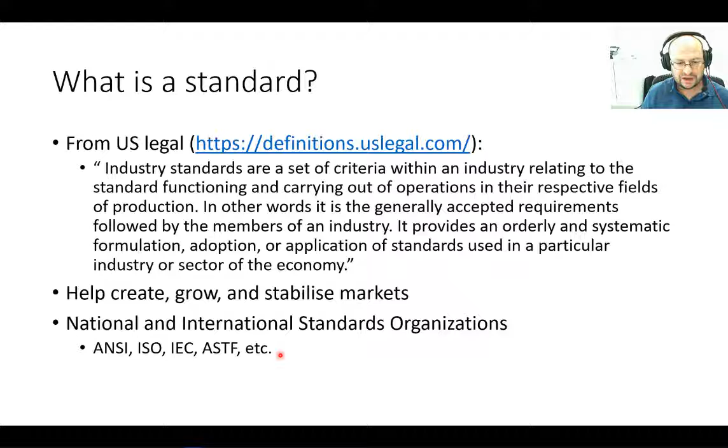There are a number of standards organizations, national and international. The international ones are usually cited as ANSI or ISO, but there are a few other standard organizations. The ones that pertain to us, robotics and collaborative robotics, are the ISO standards.

ISO 10218-1 from 2006 was the first one that calls explicitly for safety related to industrial robots development at the manufacturer level, establishing limits for force and power of industrial robots. Remember that collaborative robotics were only brought to light around 2010, 2012 to be more precise. So the first standards for robotics pertained only to the manufacturer level. So what are the standards for producing a robot? What would be the limits for force and power for a robot to be produced for the industry?

In the 2011 edition of this ISO, there were safety standards at the integration level. So given a robot and the way it's produced, what are the good practices of integrating a robot in a production line?

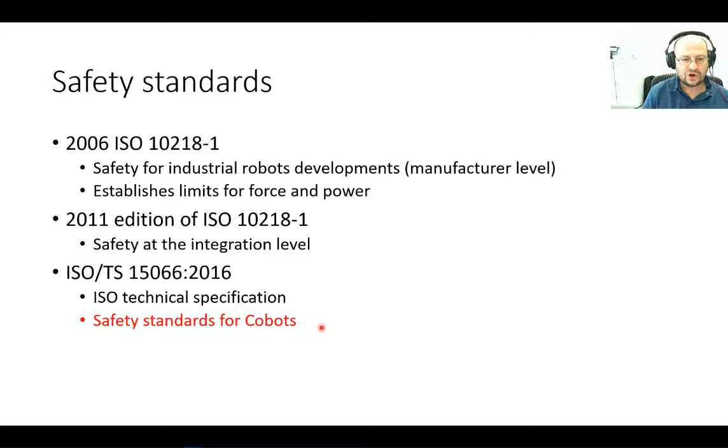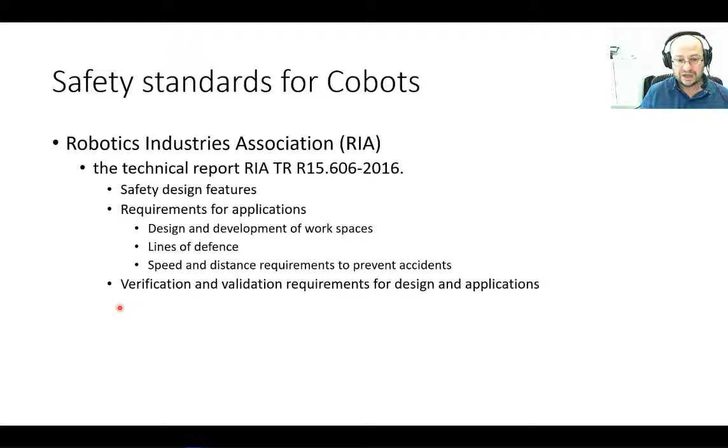And finally, in 2016, this is the most important standard for us, that's the 15066, which is the first safety standard for collaborative robotics. It defines the safety design features for a cobot and the requirements for applications. That is the first time applications are considered in the robotic standards. And the requirements talk about the design and development of workspaces, lines of defense, speed and distance requirements to prevent accidents, and verification and validation requirements for the design and applications of cobots.

So in these standards, there's a whole history of standards for robotics and collaborative robotics. These standards define several different types of collaborative operations, which we have to take into account when designing a cell and when producing the risk assessment of a cell.

If you want to know more about the standards, if you want to acquire them, you can do so by following this link. They are not cheap, I think each standard costs about $300. This is not for individuals to buy, it's for the industry. So you can purchase the new standard through that link.

There is a new standard from 2020, which now includes requirements for mobile robots, a good first step towards ensuring the safety of human workers near industrial mobile robots. For us, the cobot people in this cobot class, we are mostly interested in collaborative robotics, in the manipulator robots that can work side by side with humans. The newer standards take care of autonomous robots, autonomous mobile robots.

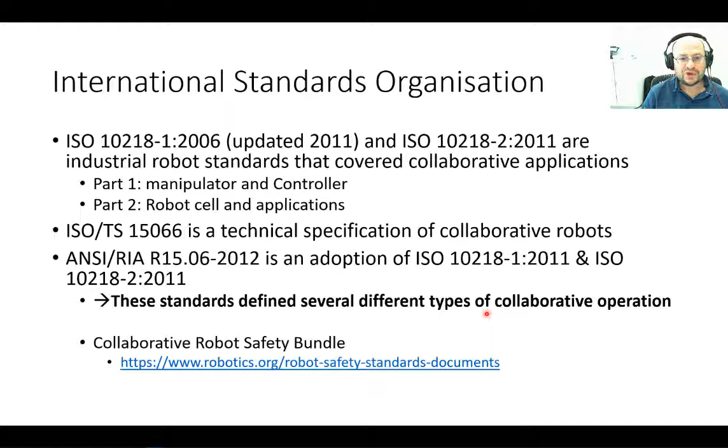So if you want to acquire standards, and if you want to develop a company on robotics, you should definitely buy all of these standards and be aware of these safety concerns and how to produce a safe cell.

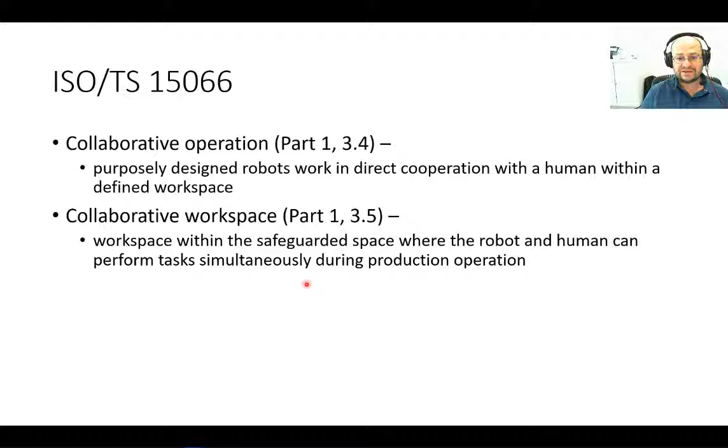In our ISO 15066, it talks about collaborative operations that are purposely designed robots that work in direct cooperation with a human within a defined workspace. That is the definition of collaborative operation. They also define a collaborative workspace, so you have to take into account the risk assessment of the operation and the workspace at the design stage. A workspace is within the safeguard space where the robot and human can perform tasks simultaneously during production operation.

So for safety in collaborative robotics, you have to take into account specific design factors that help the robot arm be safer for human interaction. This is obviously important if we want humans working side by side with robots. That's what we want, because humans are very good at creativity and problem solving, whereas robots are excellent at precision and repetitive tasks.

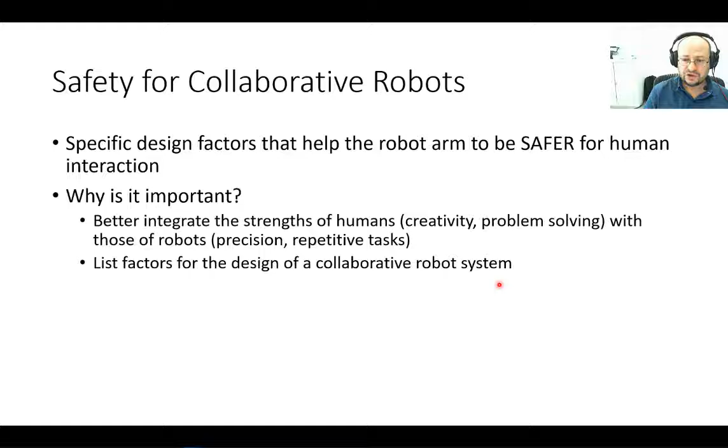So the ideal modern industry, what they call part of industry 4.0, is that we get the best of both worlds. We get the strength of humans combined with the strength of robots, and in order to do that, you need collaborative cells. But in order to have a safe collaborative cell, you have to follow a number of factors in the design of the collaborative robot system, such as what kind of function.

How would the robot and operator be working together? There are a few different kinds of operations.

One of them is coexistence, where robot and operator are in separate spaces. Usually in the coexistence workspace, the robots operate inside cages, and the robot turns off when a human enters its workspace.

It could be a cooperative coexistence, where both human and robots use the same workspace, but at distinct times. For example, if a human needs to load parts for the robot to manipulate, the robot will be off, the human will get close to the robot, put the pieces near it, press a button, and the robot will work on the pieces that were put in front of it. So there is no need for cages.

Or full collaboration, where both humans and robots use the same workspace at the same time. This can only function with strict restrictions of force, speed, and movement for the robot, for the safety of a human.

In a full collaborative workspace, there is potential contact between the operator and a robot. That could be either intended, accidental, or due to failure.

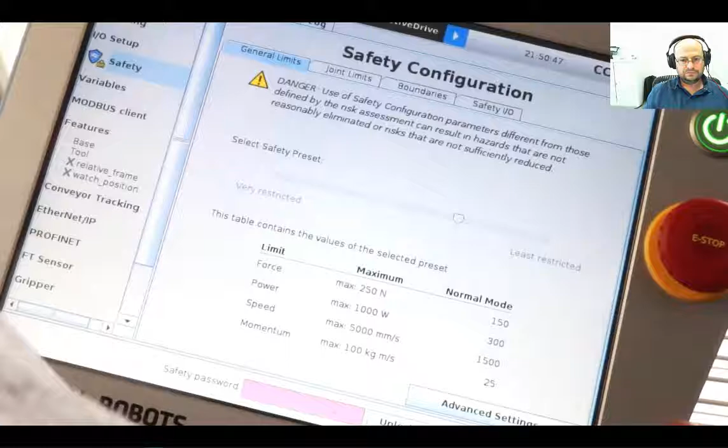In this video, you will learn how to calculate the pressure applied by a robot. Calculating pressure is simple physics. First, you need to know the maximum force the robot is applying in a particular direction. We usually rely on the force setting of the robot. For example, this robot is limited to 150 Newton.

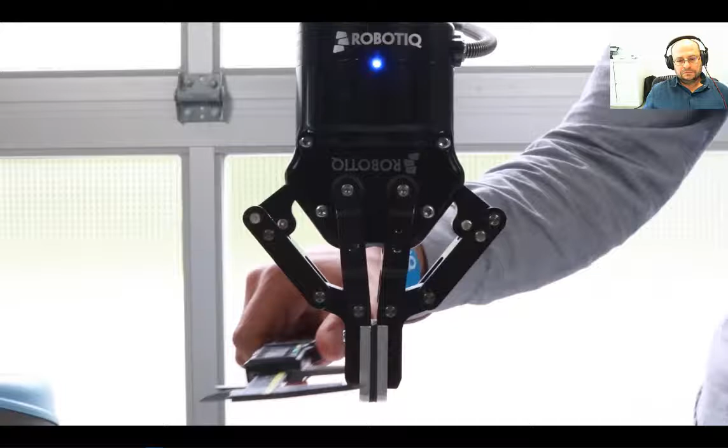You need to know the area of contact of the potential impact. First, measure the area. In this case, the area is 2 cm by 1.5 cm, which means a 3 square centimeter area. For a more complex geometry, other calculations should be used.

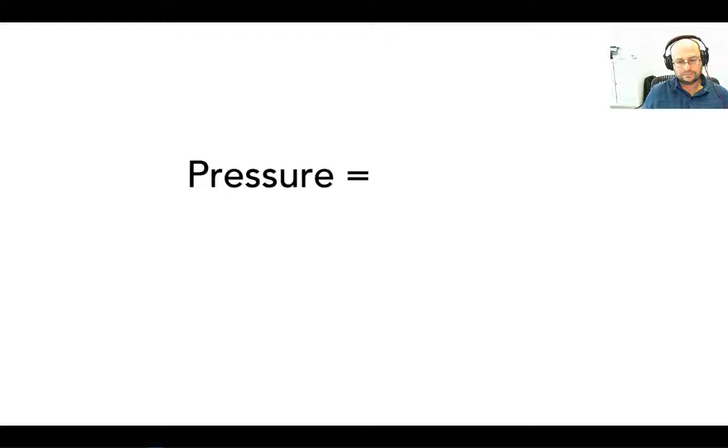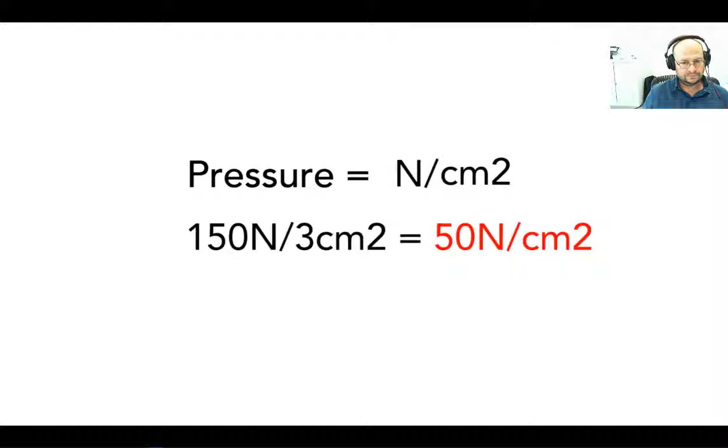The pressure is in Newton per square centimeter. By dividing the value in Newton by the value in square centimeter, you obtain the pressure value. For this example, the pressure is 50 Newton per square centimeter. According to the ISO TS 15066, this pressure is acceptable. To avoid reaching the pain level, you may want to increase the area or limit the force applied by the robot. Stay tuned for our next video on how to evaluate a risk.

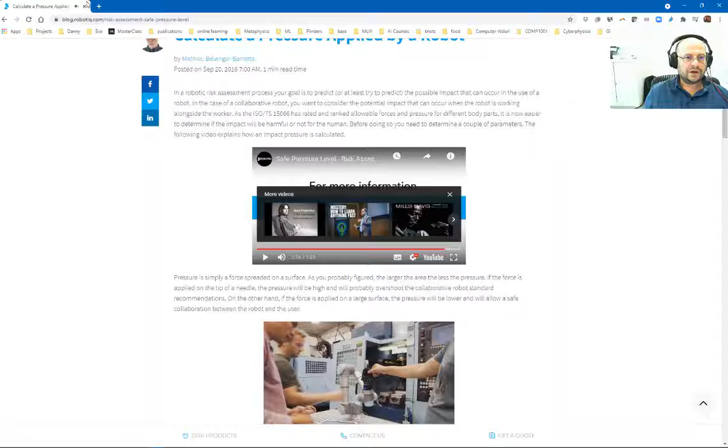Okay, so this video was about calculating pressure, and this is the big video that explains transient and quasi-static impact.

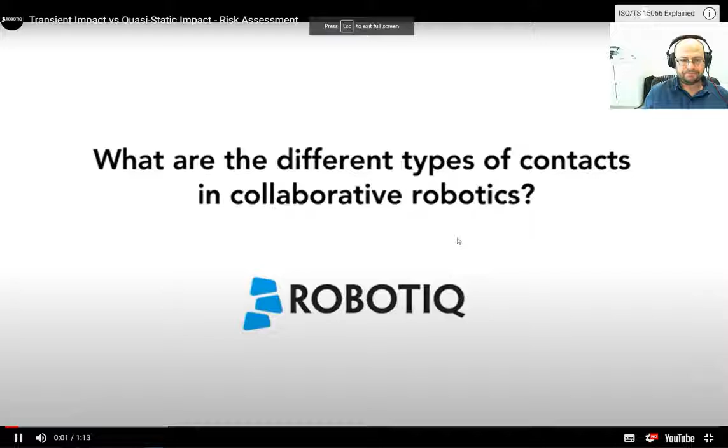Here at Robotiq, we know that collaborative robot safety is a huge concern for our customers. This is why we want to explain a couple of basic safety concepts using collaborative robots. In this first video, we will talk about the difference between a quasi-static and a transient impact.

A transient impact occurs when the robot hits you while nothing is holding you. In other words, you're able to move freely when the impact occurs. A quasi-static contact happens when the robot crushes you against a fixed object.

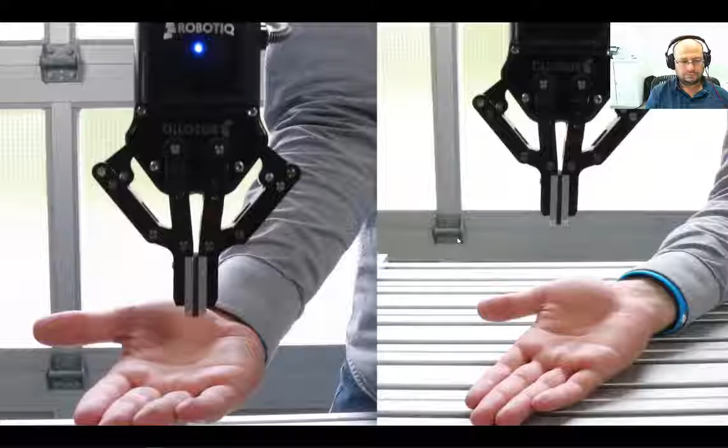To perform your risk assessment correctly, you need to consider that the pain level for a transient impact is 2 times higher than a quasi-static impact. According to ISO TS 15066, the pain threshold is 135 Newton for a quasi-static impact and 270 Newton for a transient impact. This small difference can make a big difference in your risk assessment process.

Stay tuned for our next video on how to calculate pressure due to an impact.

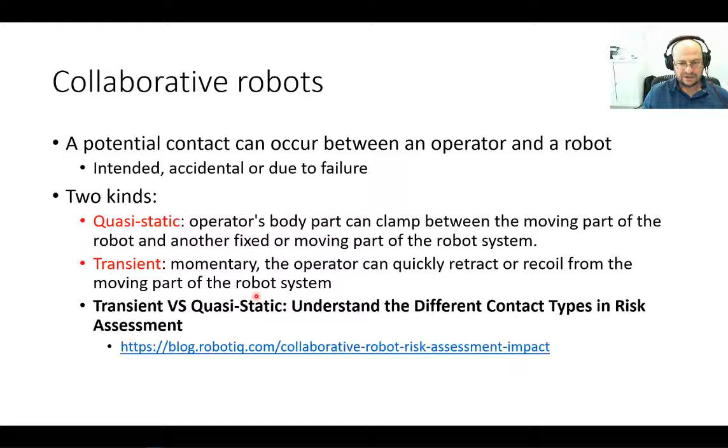Alright, so now you understand transient and quasi-static impact and how to calculate pressure.

Both are important concepts for you to create your risk assessment. You have to take into account the possible contact scenarios and the pain levels for risk assessment. We're going to see that there are tables for the pain levels for distinct parts of the body.

What the guy in the previous video said was that he just produced one single value, but there are actually different values for different pain levels in the body. Obviously the head can't take much pain, right? That's different from a hand or an arm. So the general rule is that in a transient impact, the force applied can be 2 times higher than the quasi-static impact except in critical parts of the body.

This risk assessment should be done when projecting a cell, and once the cell is completed, you have to run the risk assessment again and mitigate any potential risks.

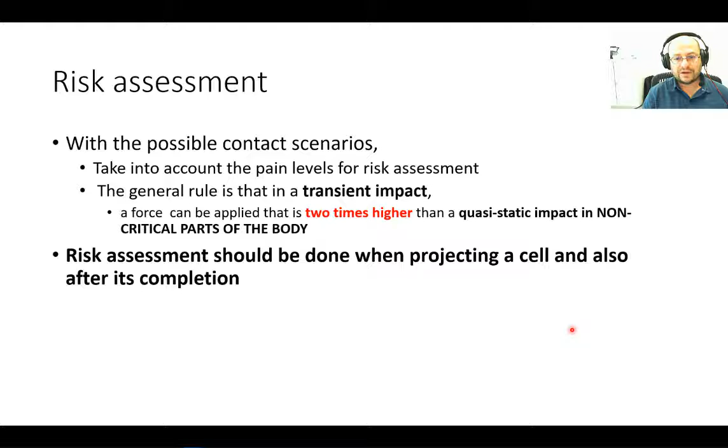So this is the table that I mentioned before, part of the 15606 standard. There's a body region, so skull and forehead are considered critical zones, and they are divided into specific parts: middle of forehead, temple, and masticatory muscle.

In a quasi-static contact, where the body part is trapped between a moving part of the robot and something fixed, there is a maximum permissible pressure of 130 newtons per centimeter square, and a maximum permissible force of 130 newtons.

This is for the middle of forehead and temple. In the masticatory muscle, the permissible force is only 65.

It's not that you want your robot to hit somebody's head. Actually, you don't want that to happen, but if it happens, this should be the maximum amount of force the robot can apply at that particular area. So when projecting your cell, you expect the robot to work around the person's arms, but if for some reason the robot reaches the height of the person's skull, the force should be reduced. You should design so that if the robot reaches a particular height, the force will be reduced.

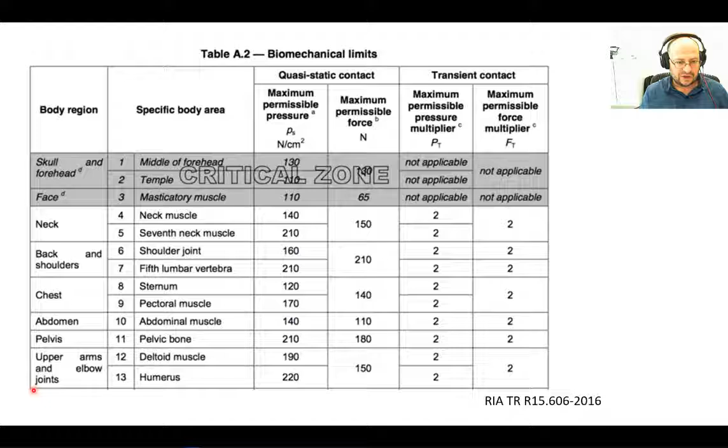As you've seen, pressure is simply force spread on a surface. The larger the area, the less the pressure. So if the force is applied on the tip of a needle, the pressure will be very high and will probably overshoot the collaborative robot standard recommendation.

So how do you mitigate this? You mitigate it by enlarging the area where the force is applied. You can't change the tip, so you're going to have to change your application.

If your application has a needle point, then it's not a collaborative application. You can't have a human working side by side with a robot holding a knife. It goes more towards traditional robotics, where you have to engage one of the less collaborative operations such as coexistence or cooperation. A robot holding a knife or a needle is not a collaborative robotic system.

Remember that the system is robot plus application, and the application includes the tool point, right? Okay, so force.

If the pressure is above the standard, you should limit it in the cell design. You can either increase the area, change the tool point, or limit the force applied by the robot.

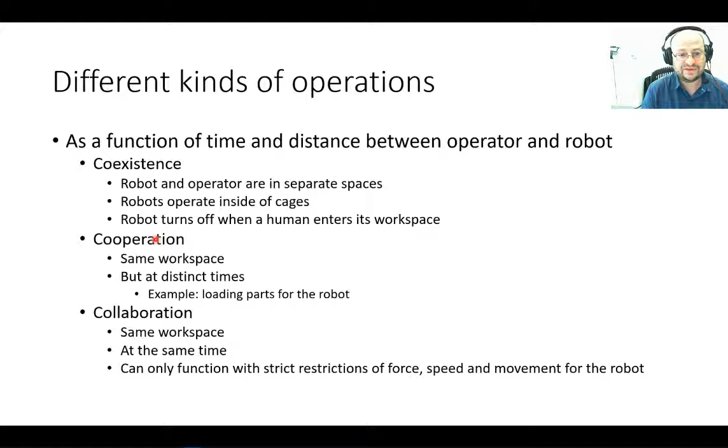In a safety rated monitored stop, a stop is assured while maintaining power to the robot. The operator may still interact with the robot, but automatic operation may resume when the human leaves the collaborative workspace. Now, in this case, this is not collaborative - this is what we call cooperation. It's the same workspace, but at distinct times. The human gets closer to the robot cell, the robot stops and waits for the human to leave the cell. Let's see a video of a safety-rated monitored stop.

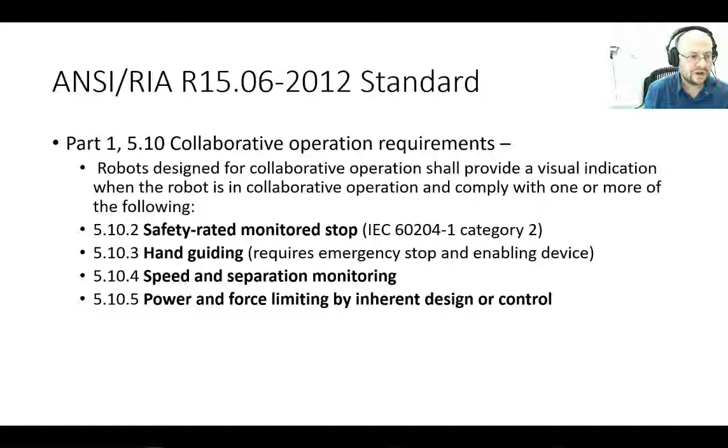All right, so this is one of the strategies. The other one is hand guiding. In a hand guiding situation, the operator is in direct contact with the robot and is using hand controls to direct the robot where to go and what to do. The robot system is under manual control. Both the person and the robot may move at the same time, where the motion is controlled by the person. Let's see this hand guiding strategy for your cell.

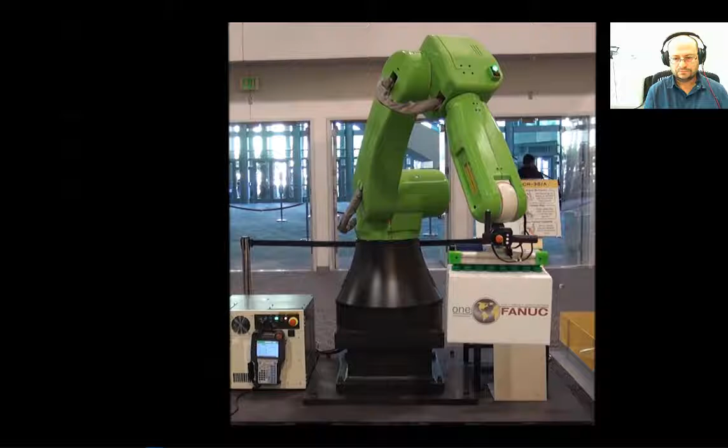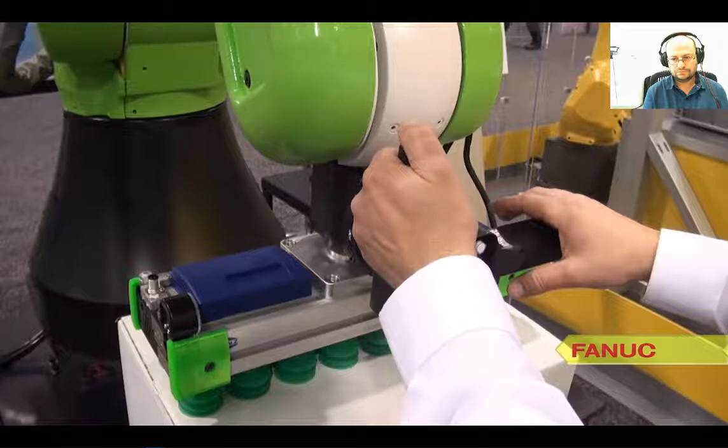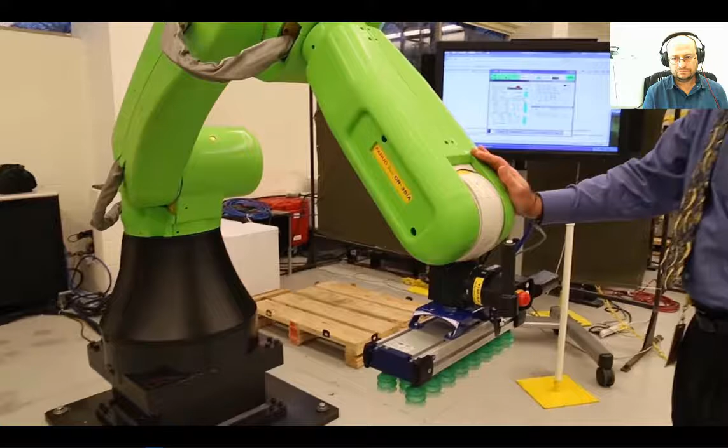An example from FANUC's new CR35IA, the first collaborative robot in the industry to feature a heavy 35 kilogram payload while being ISO certified to work safely alongside humans without the need for fencing. Another first from FANUC is the CR35IA Collaborative Robot's Hand Guidance feature. This unique feature allows an operator to safely control and guide the robot arm and tooling, providing collaborative effort between the robot's strength and the operator's finesse. Typically, a robot is jogged or moved with a robot pendant. However, collaborative robot hand guidance from FANUC enables the operator to show the robot where to go without the pendant, and can be used to teach the robot points or a path. The FANUC CR35IA collaborative robot was developed to help manufacturers solve ergonomic challenges by handling applications that are physically demanding for humans, such as repetitive heavy lifting. To learn more about FANUC's collaborative robot, please visit robot.fanucamerica.com.

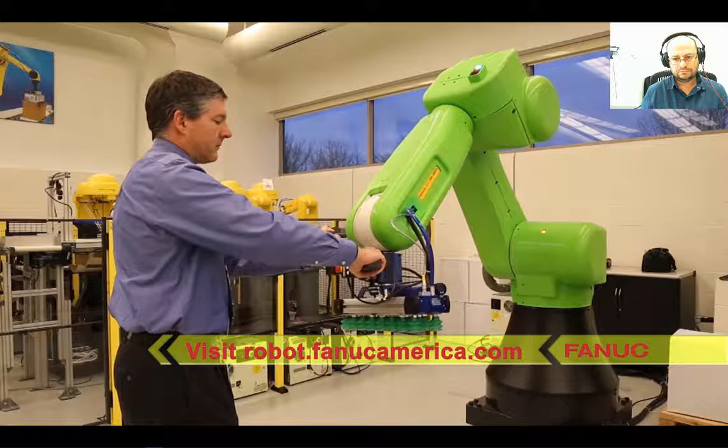Now, this is different from programming the robot. The narrator mentioned programming the robot, but what hand guiding is, is that the robot is there operating, doing its robotic thing, and you go there as a human and interfere with what the robot is doing and change the way it's doing it. So this is an actual collaborative behavior. You saw in the video that the robot moved very slowly, and once the human touched the robot, it just stopped. So this is force feedback. This is the major issue in collaborative robotics, and it's company secret - each company has its own way of doing this force feedback loop in collaborative robotics.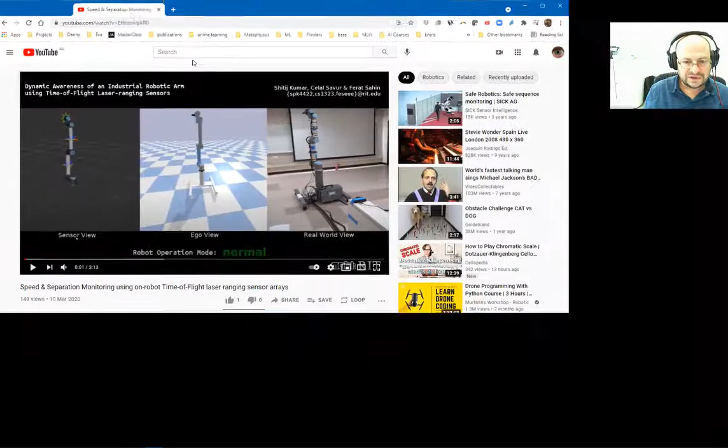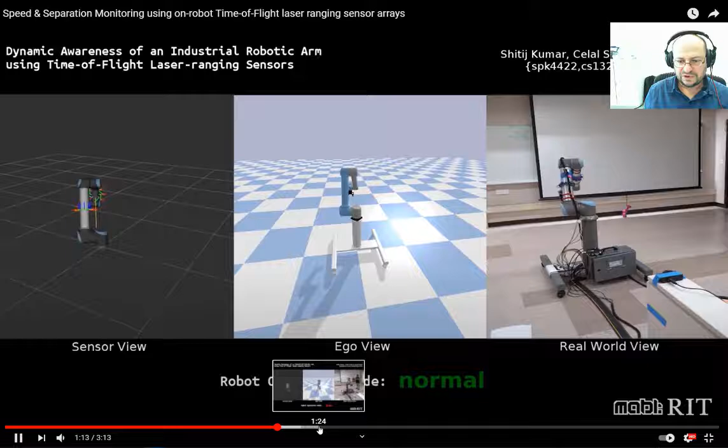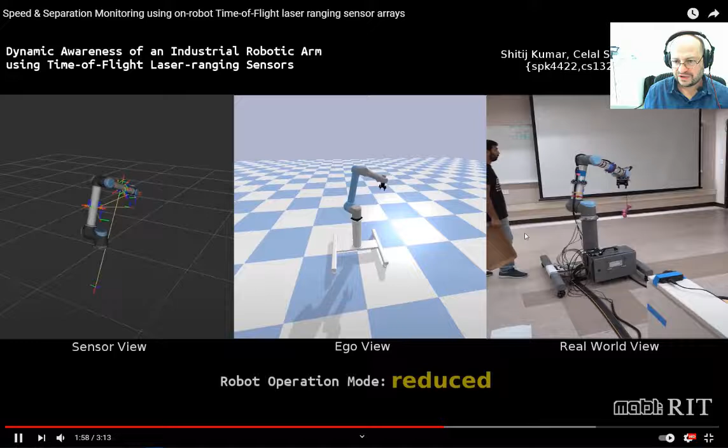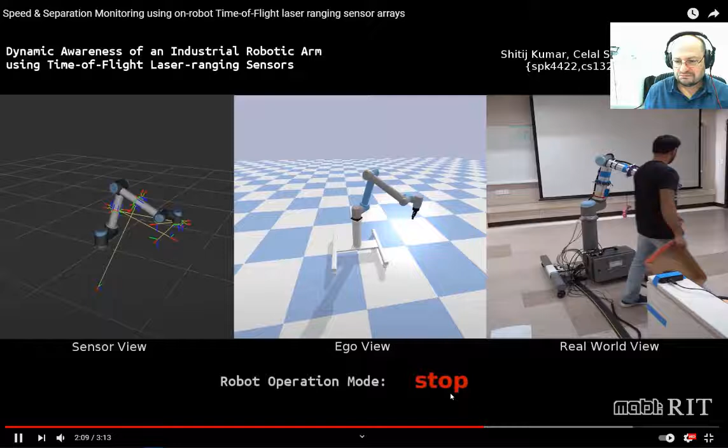This video has no sound, so the robot is operating here. Let's see if I can move when the operator comes. Here, the operator comes. The robot is interacting with the operator. So you see that it's not actually hitting the operator - it has sensors that prevent the robot from colliding with the operator. You see that there are mode operators, so it's a reduced stop. The robot stops when the operator gets into the critical area, and if the operator is not in the critical area, the robot just reduces its speed. It's what they call it. Oh yeah, here the robot stopped. This is a quite nice video - it shows this kind of operation, this strategy called speed and separation monitoring.

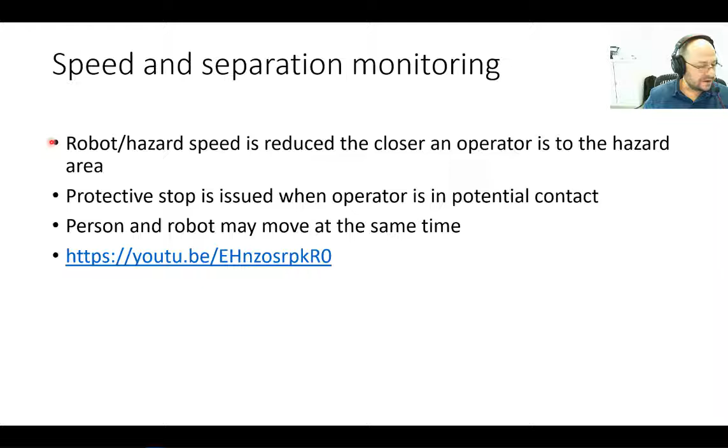Right, let's move on now. So that's a few more steps to consider - power and force limiting. You can limit the speed, torque, motion of the robot, control it so you can reduce any potential contact between robot and operator. Since in a collaborative work cell contact is permitted, but it must be controlled and its risks understood - that is the reason for doing the risk assessment that we're going to see in a few minutes. Person and robot can move at the same time. Possible risk reduction measures: we can change the robot design, such as with rounded shape and compliant materials, and appropriate application selection in robot cells.

So the end effector is very important. The workpiece is very important. The motion path is very important. As I said, a robot holding a knife or a sword is not a collaborative robot, because I should say robotic system, because the system involves a robot plus application.

You should take into account when there is transient contact and when there is quasi-static contact, and how you mitigate them or how you control them if there is no way of avoiding contact.

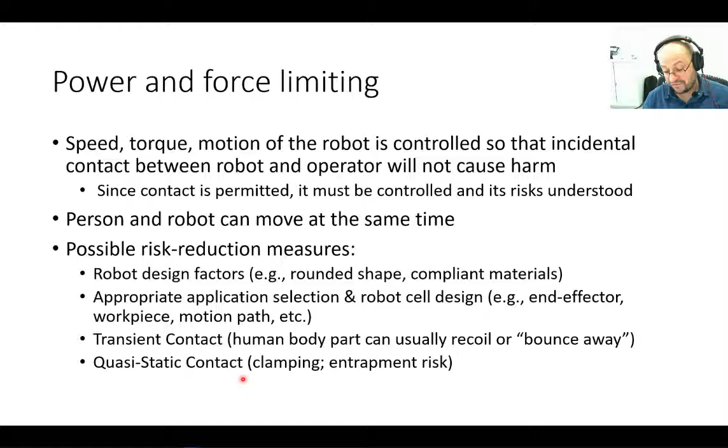Steps to consider: if you are building a cell, know your standards. Think in terms of the whole system, as I said 100 times, robot plus tool plus object. Select the adequate equipment, do the risk assessment, we are going to see in a minute, and mind your surroundings. Be aware of the robot's location at all times, avoid positions or paths that might cause contact with face, head, neck, clamping or pinching.

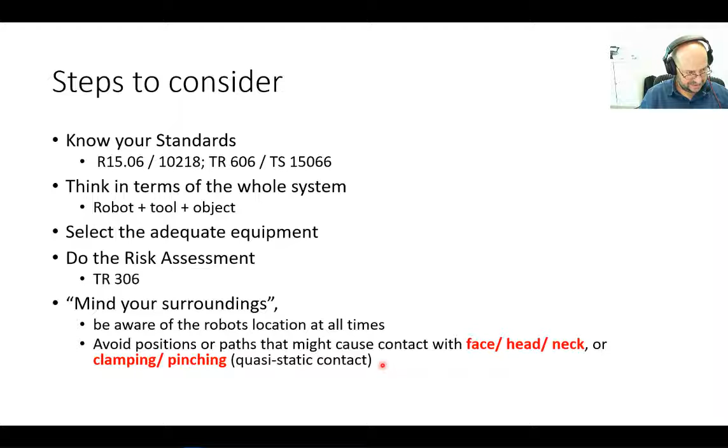In the end, you can do the best risk assessment, but the one at risk is you as operator. For more information, you can go to the RIA, Robotic Industries Association. There's a bunch of information, and as I said, this is manual by Robotiq.

And let's take 5 minutes to talk about risk assessment. We talked about potential risks, and how you can do what you can do with your cell to mitigate these risks. But in order to know what is the risk of your cell, you have to do the assessment, where you identify hazards, you mitigate risks, and you document the whole process. And this is a responsibility of the entire team, because the entire team should be aware about the risks involved in a collaborative cell. Let's see a brief video introducing risk assessment from Robotiq again.

In a risk assessment process, it is important to identify the different risks involved in the use of a collaborative robot. Evaluating a risk correctly can be a game changer in your risk assessment process. The risk is usually evaluated using 4 different criteria: severity of injury, possibility of occurrence, possibility of avoidance, and frequency of exposure.

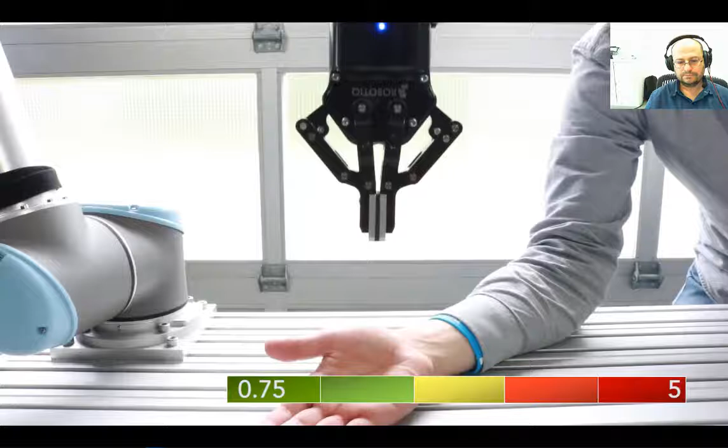The third criterion is possibility of avoidance, rated from possible being 0.75 to impossible being 5. In this case, the robot is not moving fast enough to crush me instantly, so it is possible to avoid the impact. Finally, the frequency of exposure is rated from 0.5 being annually to 5 being constantly. In this case, the worker is exposed daily to the hazard.

Then, all these criteria are multiplied together to give a certain rate. In this case, 1.4, which is considered as being negligible. Once all your risks are evaluated, you can do a risk reduction process, starting with the most dangerous one. Stay tuned to see other videos on collaborative robot safety.

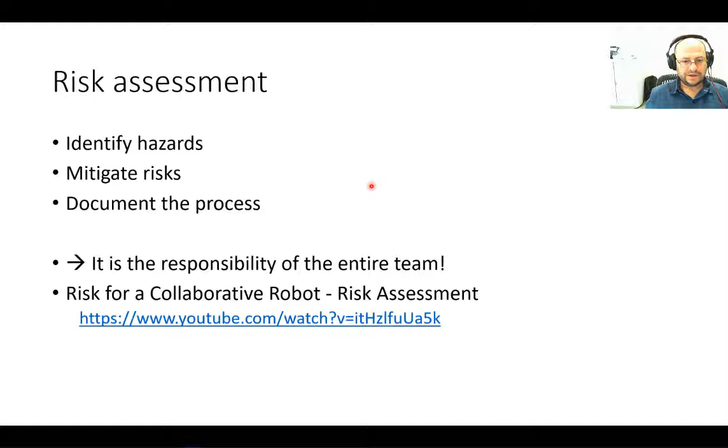Right, so just to put into slides what he said, there are 4 criteria for risk assessment: severity of injury, SI, that runs from .25 to 65, where .25 is the minimum severity, and 65 is very severe. Possibility of occurrence, that's 0.05 to 6. Possibility of avoidance, 0.75 to 5. Frequency of exposure, 0.5 to 5. In the rating, you multiply all of these criteria.

So, severity of injury, SI, it's a qualitative measure, right? So it can be classified as serious. It's normally a non-reversible injury. Likely, the person will not return to the same job after recovery from incident. Or there will be either a fatality, a limb amputation, a long-term disability, a chronic illness. If any of the above are applicable, the rating is serious.

Can be moderate, normally reversible. Likely, the person will return to the same job after recovery. That includes broken bones, severe laceration, short hospitalization, short-term disability, lost time of multiple days of work, fingertip amputation, not thumb. If any of the above are applicable, the rating is moderate.

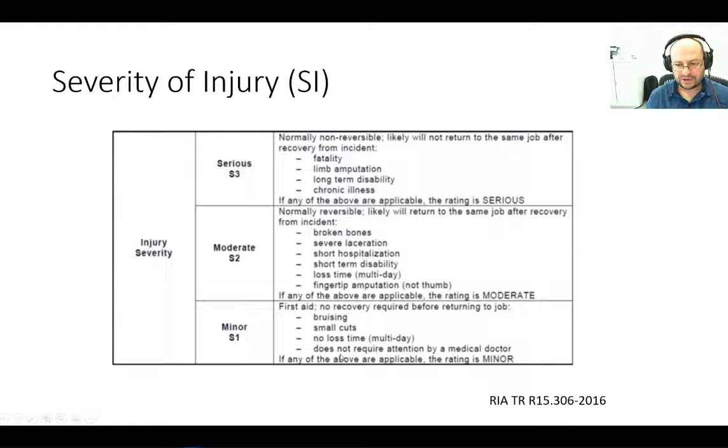And minor, there will just be first aid, no recovery required before returning to job. That includes bruising, small cuts, no loss of time. It does not require attention by a medical doctor.

Exposure can be high or low. Typically, high is more than once per hour. Frequent or multiple short durations, situations which could lead to task creep, and does not include teaching the robot.

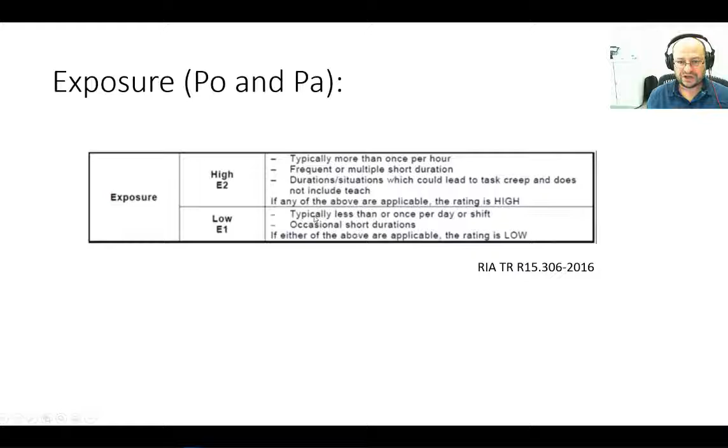If any of the above are applicable, the rating is high. Low is typically less than once per day or shift, occasional short durations. And avoidance is based on the clearance distance and reaction time.

Not possible to avoid: where there is insufficient clearance to move out of the way, the robot system layout causes the operator to be trapped with the escape route towards the hazard, and safeguarding is not expected to offer protection from the process hazard.

Not likely: insufficient clearance to move out of the way and safety-rated reduced speed control is used, obstructed path to move to a safe area, hazard moving faster than reduced speed, inadequate warning or reaction time, might not perceive the hazard exists.

Or likely: sufficient clearance to move out of the way, hazard is incapable of moving greater than reduced speed, adequate warning and reaction time, positioned in a safe location away from the hazard.

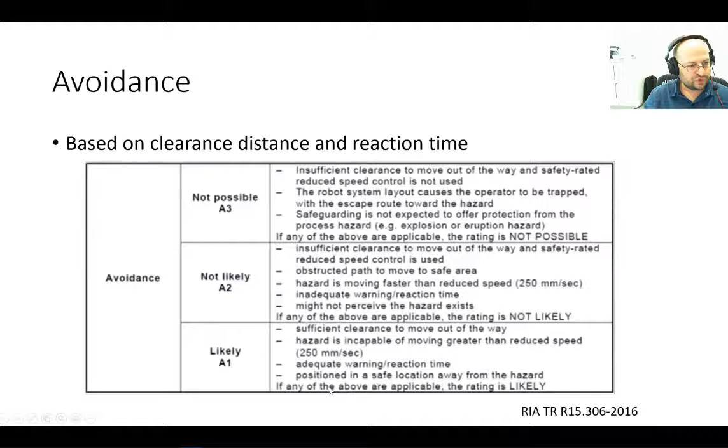So you actually want the avoidance to be likely for any potential risks in your robot. And you apply the risk level matrix, where you evaluate every one of your three factors: severity of injury, exposure to hazard, and avoidance of hazard. You want all to get to risk level negligible.

So for instance, you want the severity of injury to be minor, the exposure to hazard to be prevented or low, and the avoidance of the hazard to be likely. Then you're going to get a negligible risk level.

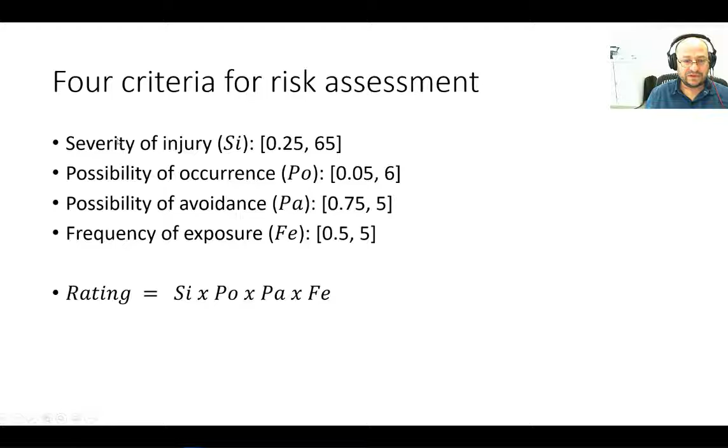So these are actually two ways of doing your risk assessment. You can either do the risk level matrix, or you can do the rating, multiplying. The classes are the same — it's just a different way of taking your decision about your robotic cell.

And obviously, you want to eliminate your risk. You have to use risk reduction measures where you either eliminate the risk, substitute, or limit the interaction, or in the end safeguarding — changing the speeds of the robot, or changing the way the robot operates with a human.

That could be coexistence instead of actual collaboration. Or you can use complementary protective measures, warnings and awareness. Usually it's good to have a combination of all these risk reduction measures to change a risk level from very high and high, or even medium, to low and negligible. Low and negligible are risk levels allowed by the current robotic standard.

So how do you do a risk assessment? You should prepare for and set the limits of the assessment. You should understand the intended use of the robot, the application, the authorized personnel, the process flow, and the limits — force limits and speed limits.

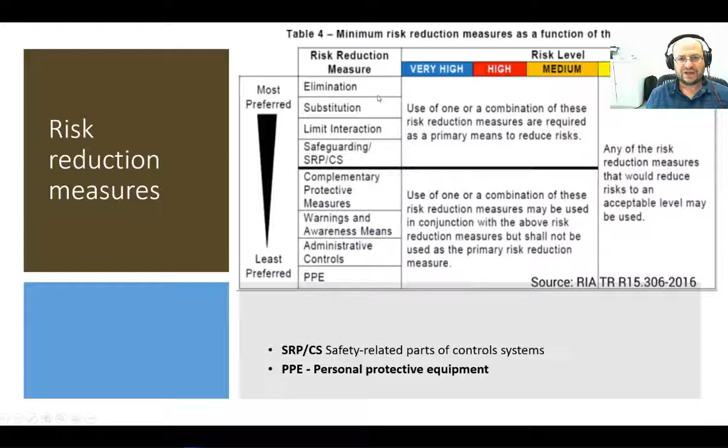Identify the tasks and potential hazards. Quantify the initial risk using the risk scoring system. Once you quantify the risk, you do a risk mitigation process, reducing risk using a number of techniques, as I mentioned briefly here.

And after that, you assess residual risk. If there is still considerable risk in your risk assessment, you have to repeat steps two to five until the residual risk is acceptable, and document the whole process.

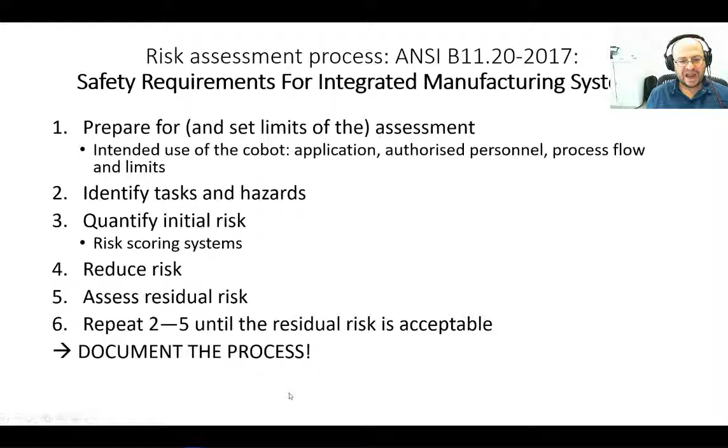Potential causes of injuries are obviously unauthorized access, plus people that don't know how to handle a robot and don't know what the robot is doing. Fault in the control system is one of the most common causes of hazards. Mechanical failures and electrical power failure also carry risk of electrical shock hazard.

Inadequate installation is the task of the engineer to verify. Good design is essential — use the appropriate robot for the appropriate application.

I supervise students in work placements, especially related to industrial robotics. And the first question I always ask is: where is your installation? Is it adequate? Is it using the appropriate robot? Is the design fit for risk mitigation?

That is essential. Of course, mechanical failures, electrical failures, and faults in the control systems are difficult to control, but this is our task — to provide an adequate installation. This is the task of robot engineers and technicians.